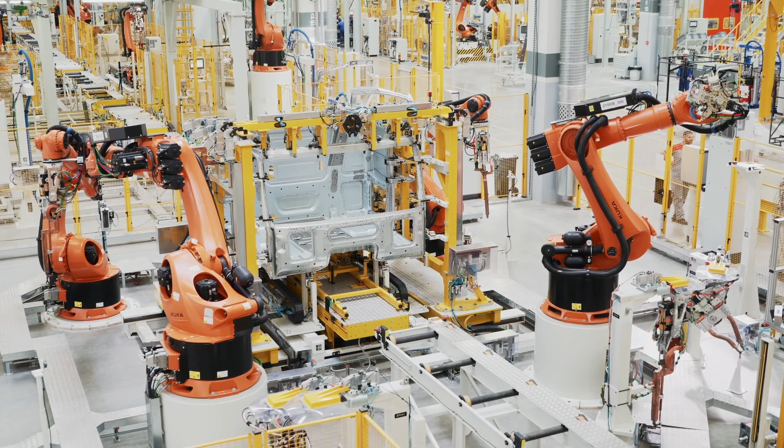If you are a software engineer, you are sitting on one of the most valuable career transitions available right now. And most people in your position don't even know it. Robotics needs developers badly, and software engineers are the easiest people to get there. So why aren't more developers making the move?

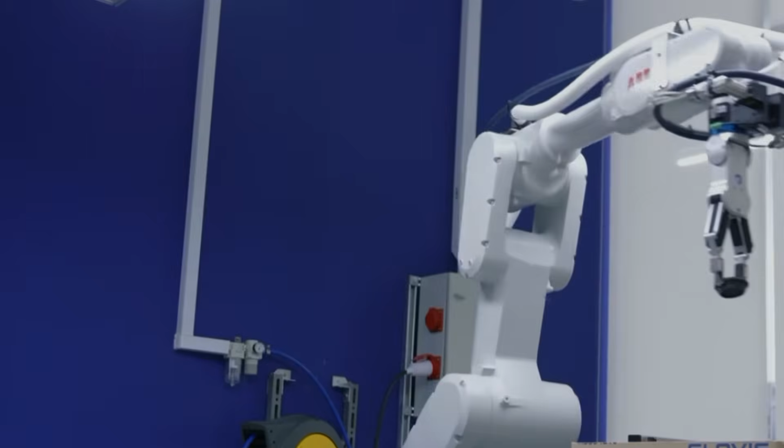Well, robotics has a software problem. Most robots today are built by roboticists, engineers who are brilliant at making machines move, but who were never trained to write production-grade code. They'll get the robot to do the task, but the code base is often fragile, hard to maintain, and nearly impossible to scale.

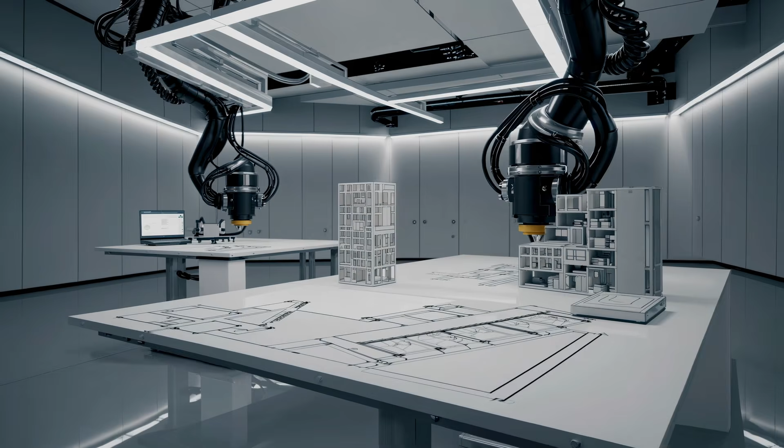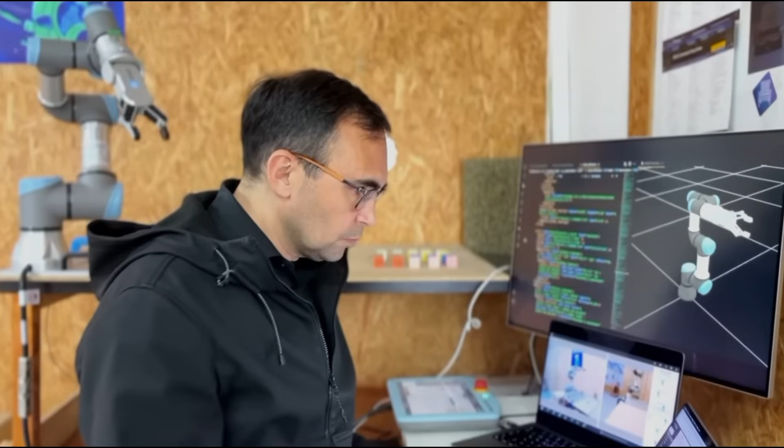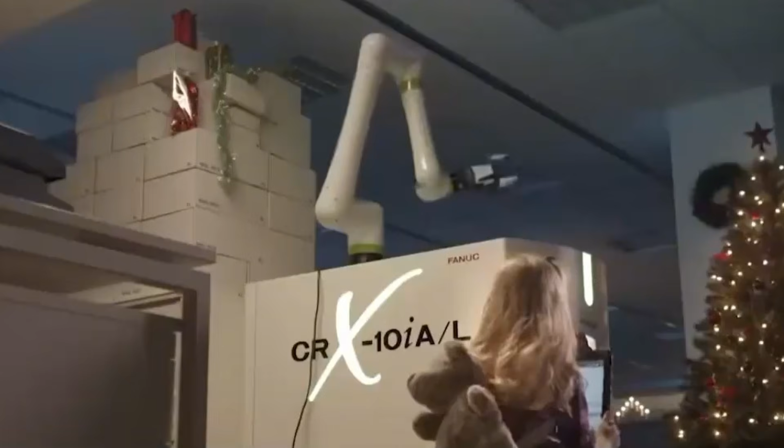That's exactly the gap you feel as a software engineer. Your instincts around clean architecture, testing, modularity, and code quality are generally rare in robotics. And companies building serious products know it. Robotics developers need to know which algorithms exist, how to use them, when to use them, and how to integrate them into a complete robotics application. That is the role, not inventing new algorithms, but building the software that makes the whole robot work.

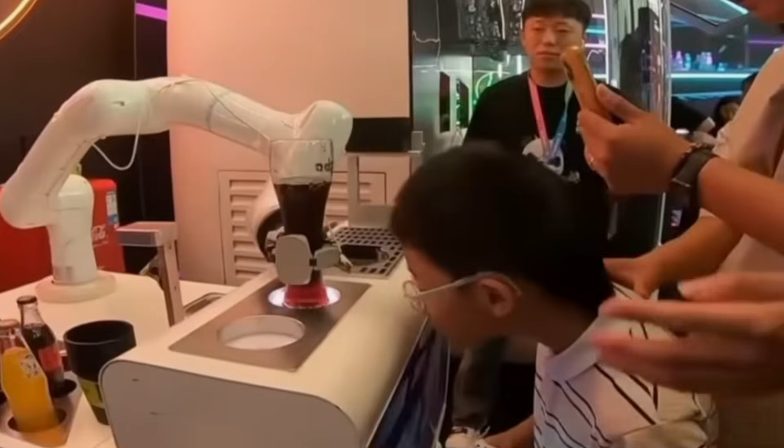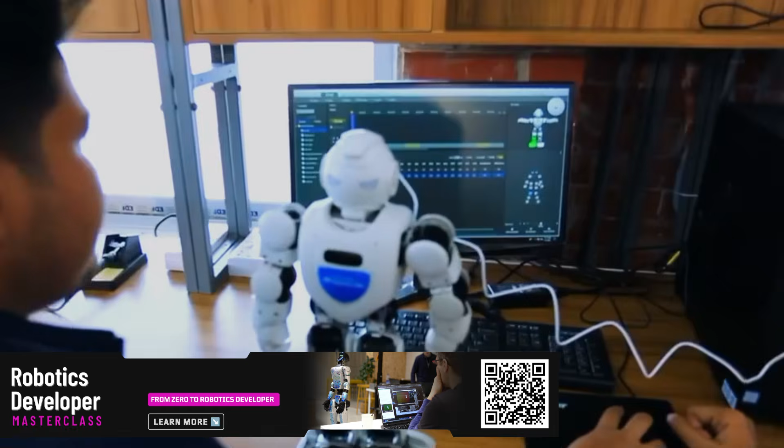If you are like a lot of software engineers, you are drawn to the idea of working on something physical, something that exists in the real world, not just on a screen. But the moment someone mentions electronics, sensors, or firmware, the interest fades fast. That's completely understandable. You became a software engineer for a reason. Hardware was never part of the deal.

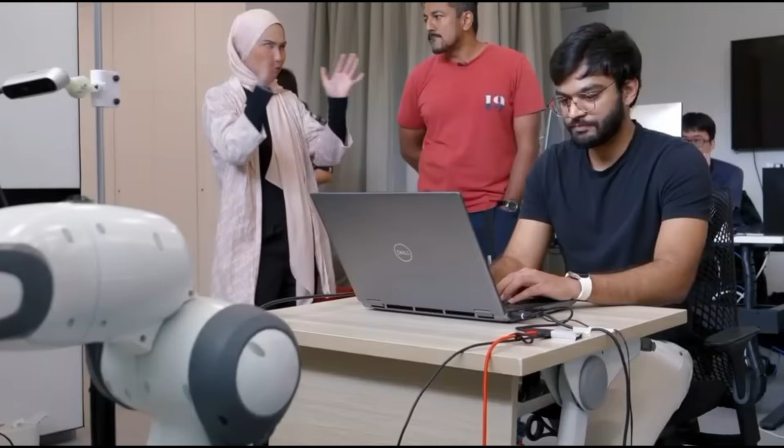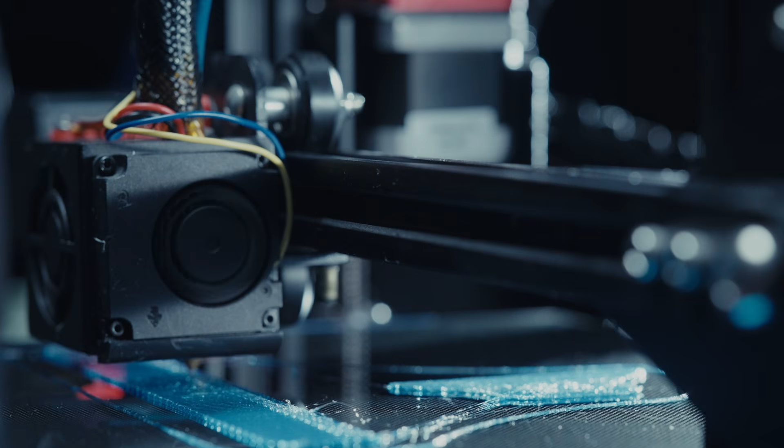And here's what most people don't know: it doesn't have to be your starting point. Thanks to the Robot Operating System, you can completely abstract the hardware from the software. You program a robot by knowing its ROS API and testing in simulation. You can forget about the hardware and concentrate on the software that makes the robot do what you want.

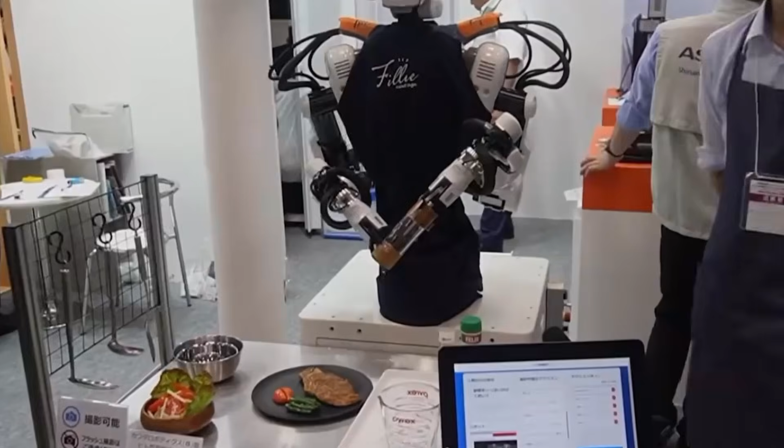Think of ROS the way you think of an operating system. ROS abstracts the hardware details, enabling developers to write higher-level software without worrying about the specifics of the underlying hardware. That makes it easier to port applications across different robots and platforms.

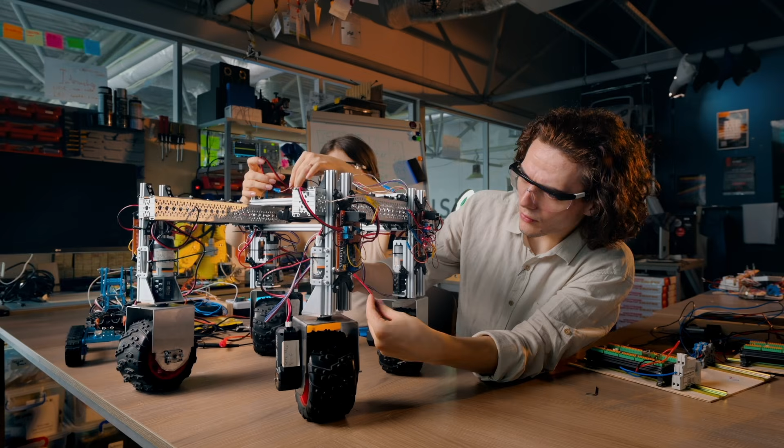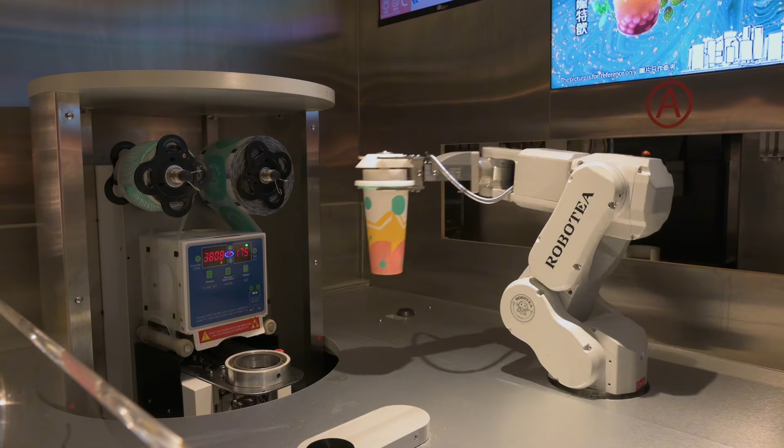This is what a soft transition into robotics looks like. You don't start by building a robot. You don't need a lab. You don't need to know how a lidar is wired or how a motor driver works. You start with ROS, learning the topics, services, and messages that give you access to any robot's sensors and actuators through a clean software interface.

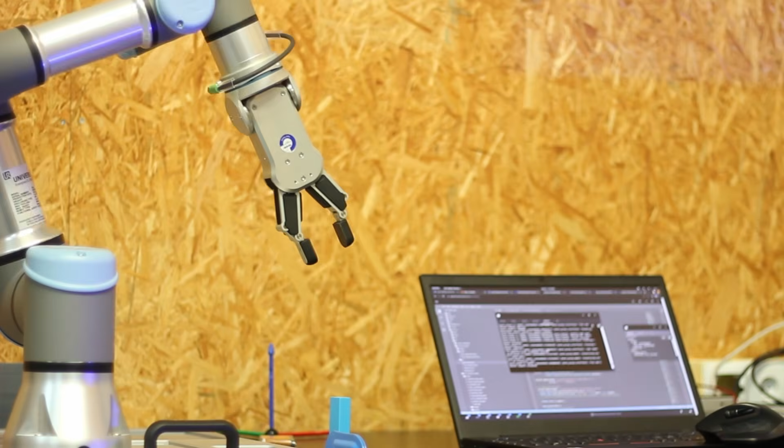Camera data, LiDAR scans, joint positions, all of it comes to you as structured data, just like any other API you have been working with. You test everything in simulation. It could be Gazebo or Isaac Sim running on your computer, presenting the exact same ROS interface the real robot would. Your code doesn't know the difference.

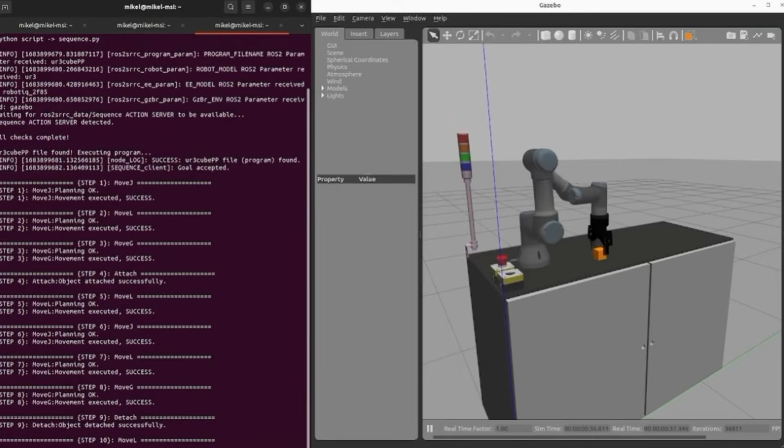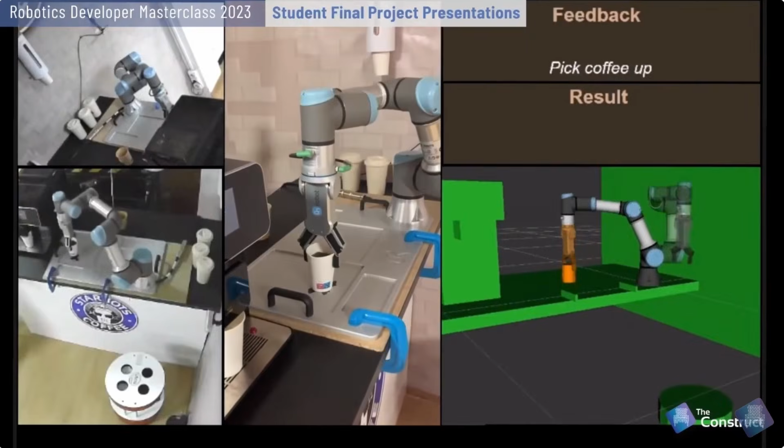You have a simulation of the robot running on your computer that can run and act like the real robot, and you can actually send commands to it and it replies accordingly. No hardware, no risk, no lab required. Just your laptop, a simulator, and the software skills you already have.

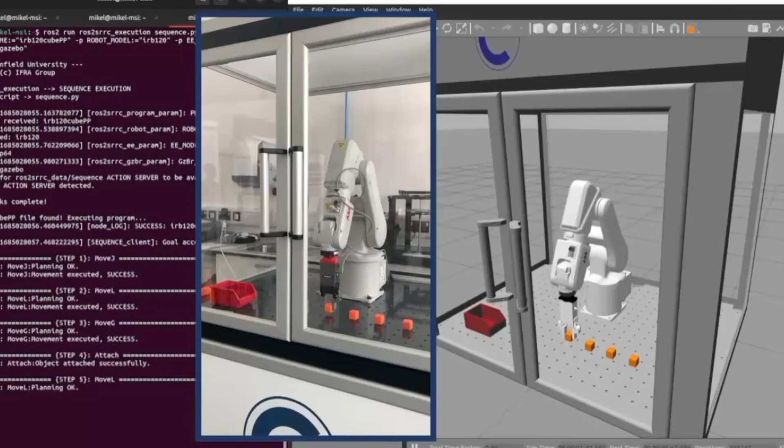But, and that's important, simulation is the starting point, not the finish line. At some point, your software has to run on an actual robot. That moment is less scary than it sounds, because if you have done the simulation work properly, most of your code is already correct. The transition is gradual.

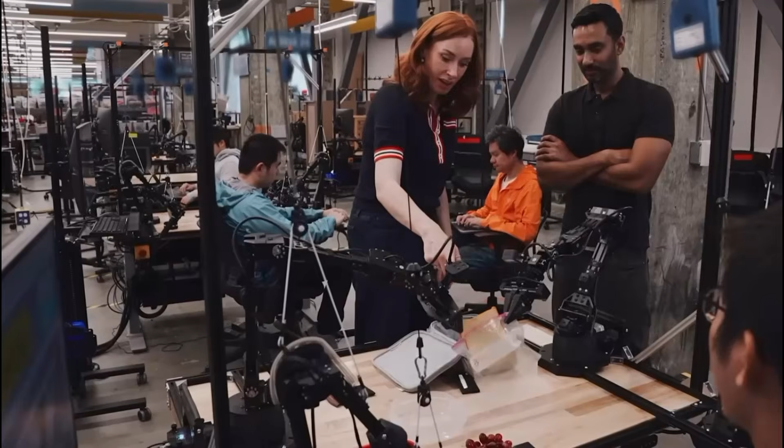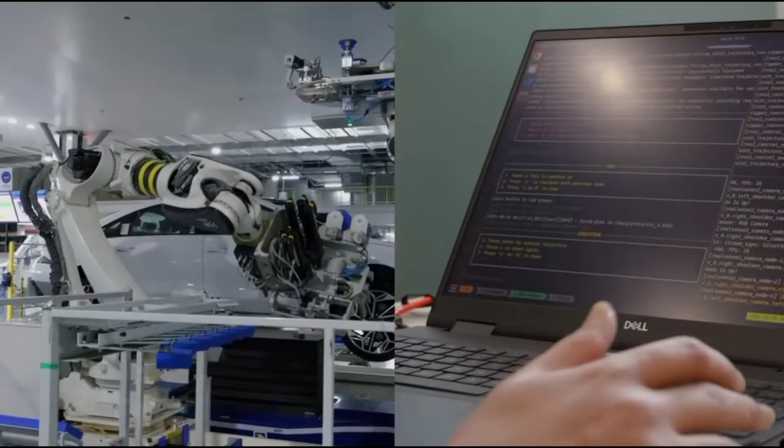You start by connecting to a real robot over a network, and because ROS presents the same interface the simulator did, your code runs on the real hardware with minimal changes. The topics are the same, the messages are the same. The structure you build in simulation carries over directly.

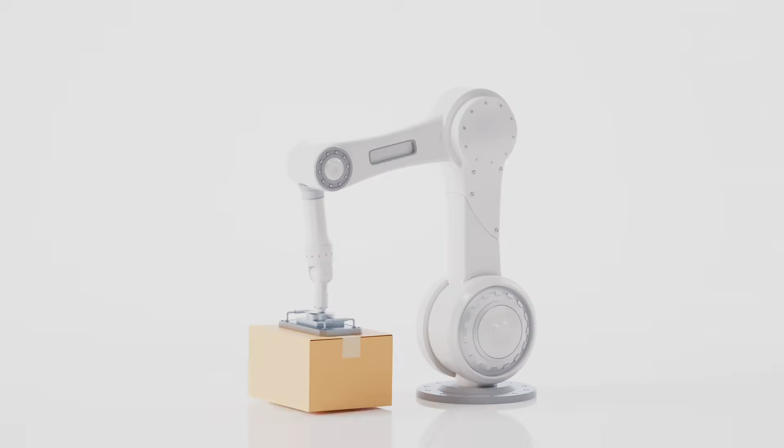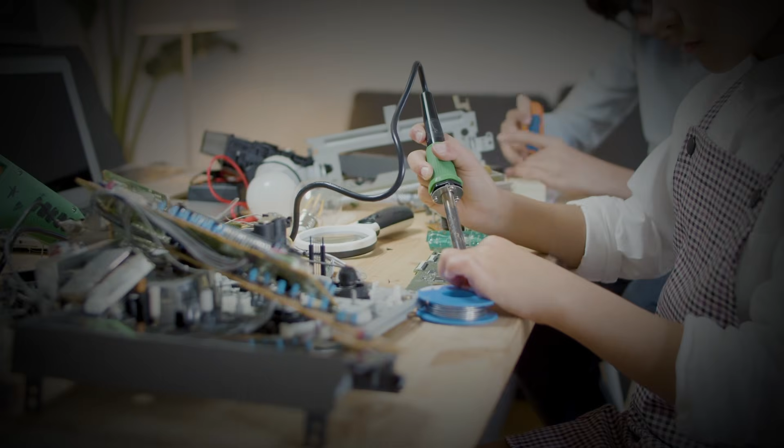What changes is the feedback. In simulation, everything is clean and predictable. On a real robot, sensors have noise, motors have latency, the floor isn't perfectly flat. This is where you learn to read actual hardware, not by understanding electronics, but by learning to interpret what your software tells you about the physical world.

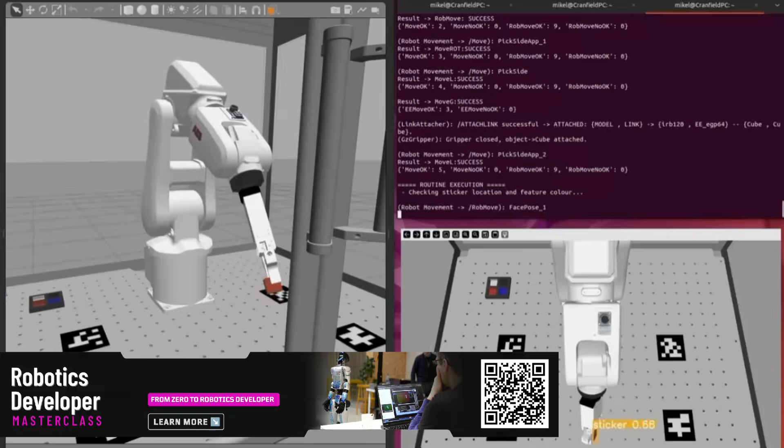You'll start noticing things: a sensor reading that drifts, a command that arrives slightly late, a behavior that worked perfectly in simulation but needs tuning on the real machine. Diagnosing and fixing those gaps using logs, raw topics, and your existing debugging instincts is exactly the kind of work a strong software engineer does well.

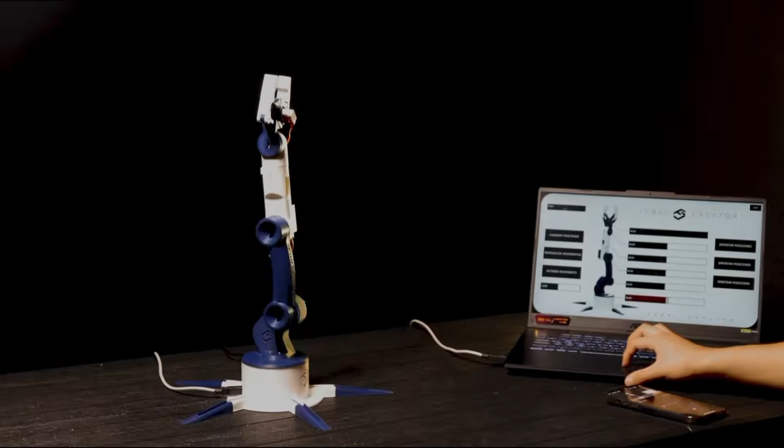The hardware knowledge you build this way is practical and targeted. You don't need to understand how to design a motor controller. You need to understand how to work with one. That's a much shorter distance than most software engineers imagine.

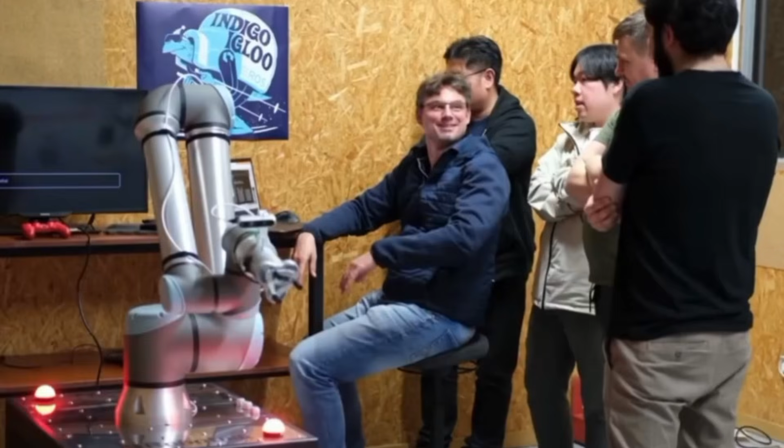The window for this transition has never been better timed. Every week, more companies join looking to train engineers to program robots. They cannot find properly trained people who know how to program robots. By 2025, ROS has achieved widespread adoption, powering numerous robots globally. And in 2024 alone, over 530 million ROS packages were downloaded. Every major robotics company is building on it.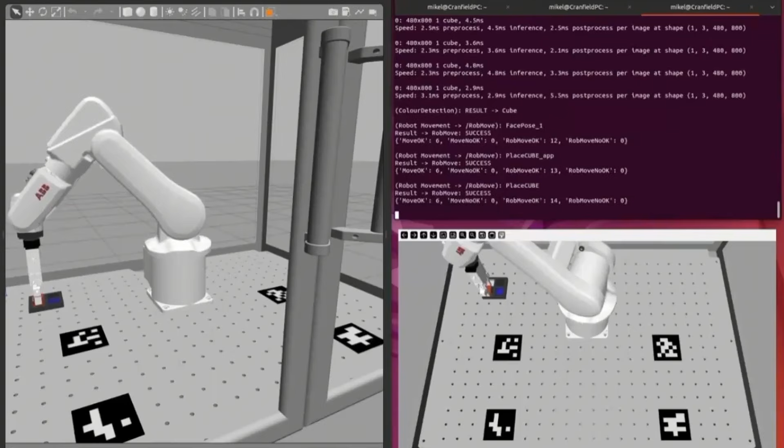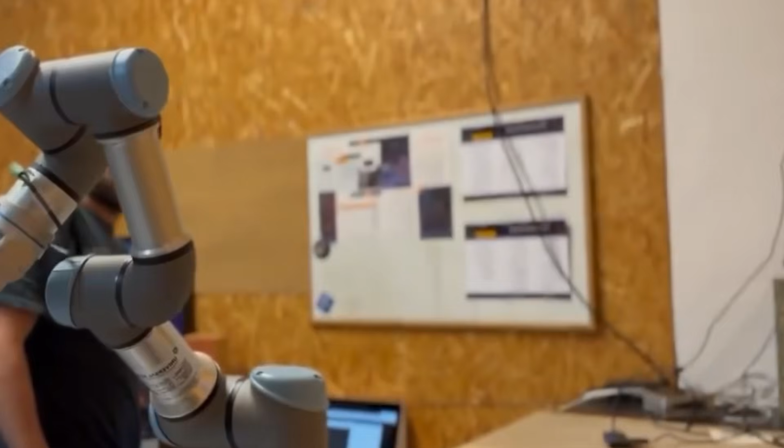Your investment in learning ROS translates directly to every company in the field, and the salary supports it. Senior robotics software engineers are pulling well above $150K, with the market actively rewarding engineers who combine strong software fundamentals with robotics domain knowledge. The fastest structured path from software engineer to robotics developer is, of course, the Robotics Developer Masterclass at The Construct.

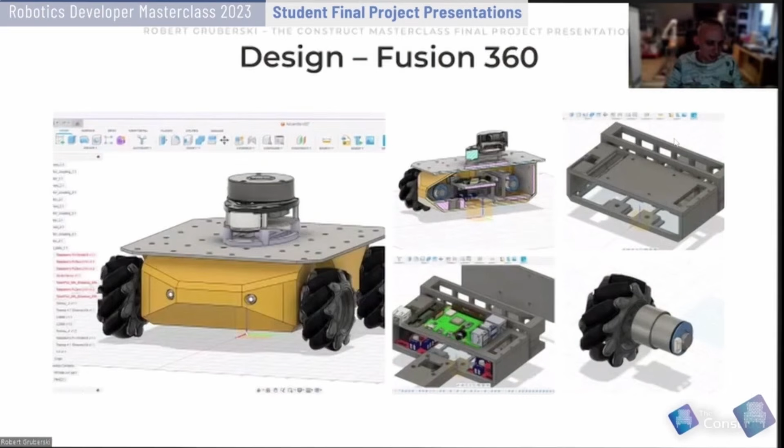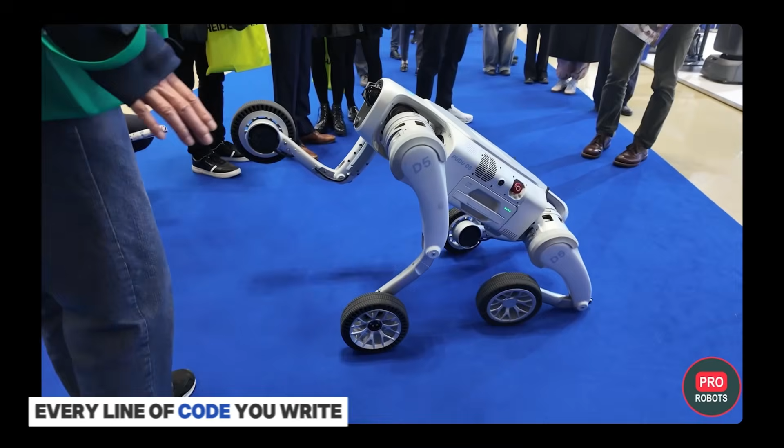Robotics is the most exciting field in tech right now. The robots are real, the jobs are open, and as a software engineer, you already have the hardest part of the skill set. You just need the robotics layer. We'll give you that.